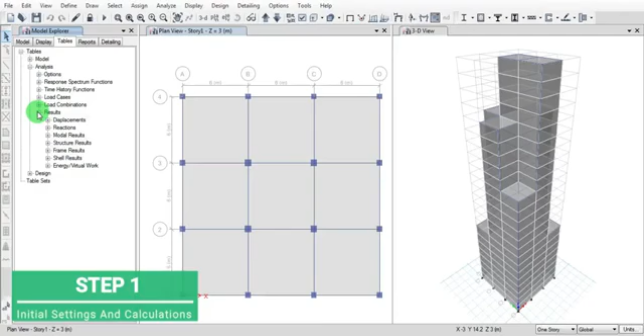Open the building for which we ran the analysis, the tall building. This is the model we created already. Then go to Tables, Analysis and Results, then Frame Results, click on Column Forces. Then arrange by Story 1.

Here we want only dead load cases. Then sort ascending. These are all the columns, C1 to C16. And then we have to know the column numbers here. To display the column number, go to the View option, Set View Options, click on Labels and click on Apply.

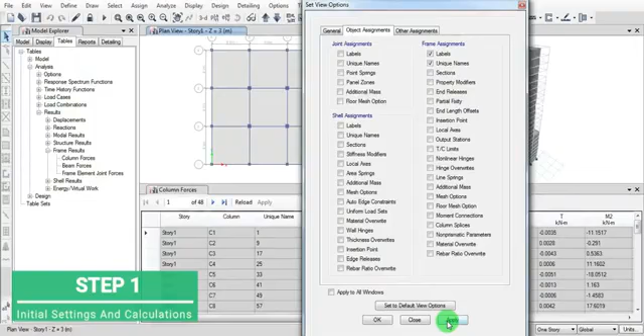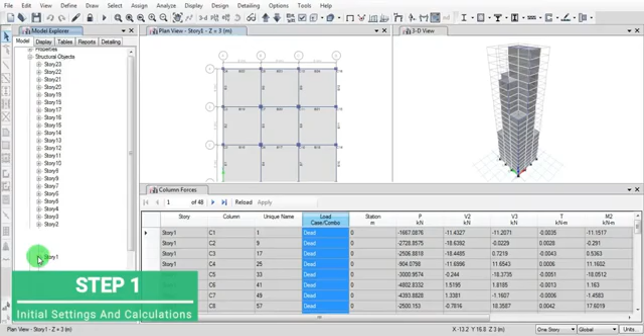Here we see all the column numbers like C1, C2, C3, C4, C5 up to C16. Now go to the structural object and Story 1. Here click C1. Here you get column sizes. Click on all the columns. Here you get all the details of the column sizes. There are 2 column sizes, 500 by 500 and 600 by 600.

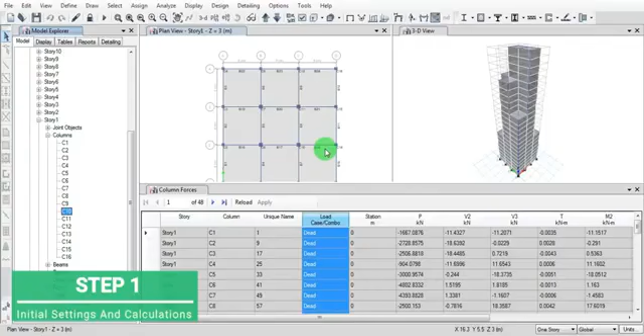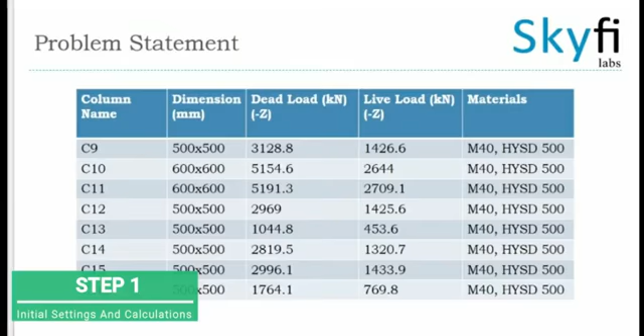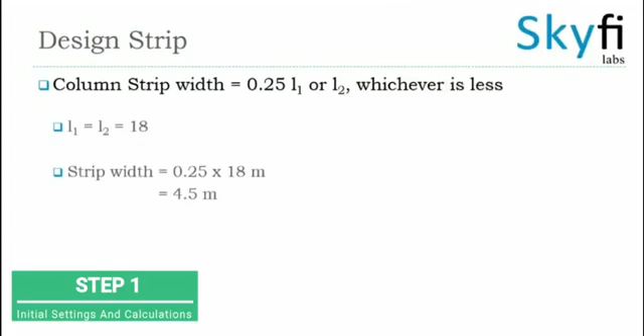Now define section properties. Go to section property and select materials for the 500 by 500, that is M40 and HYSD 500, similar for both. Now this is the problem statement we got from our design problem. It is a footing size of 18 by 18 with 2 meter extension on either side. This is how we have to find the subgrade modulus, and this is the calculation for the design strip.

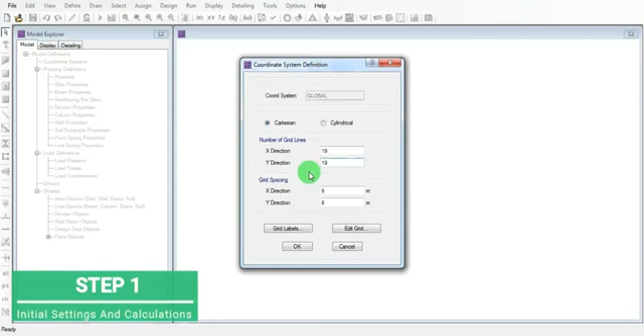Now go to the SAFE software and set IS456. Then add the cover and rebar options. Then set the grids. We have 18 meters, so there will be 19 grid lines in both directions. Now set 1 meter. This is how we got the grid.

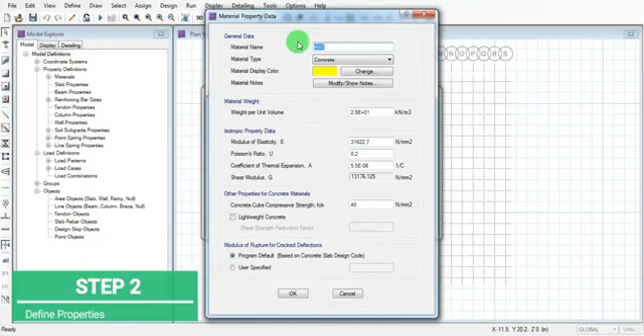Then go to material, define material M40 concrete and add all the standard values for M40. Click on OK. Then add HYSD 500 bar and add its standard properties. Then go to the slab property, add the slab property for the mat footing, which is M40. Add the thickness 500 mm.

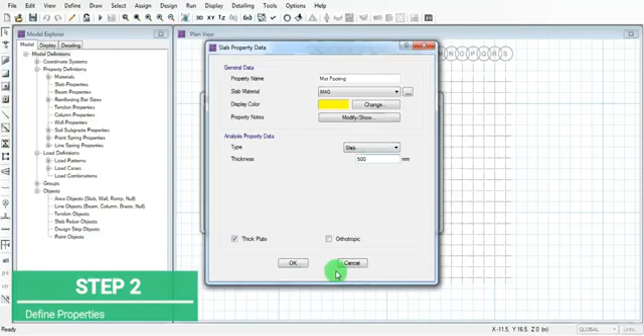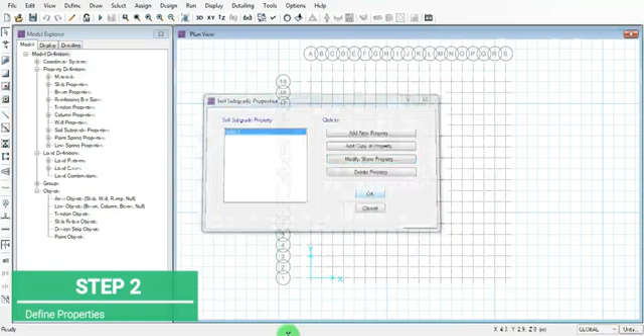Click on OK. Then define the column property, add a new column, column 1. We have 2 columns, 500 by 500 first. Add its sizes 500 by 500, click on OK. Then another column 600 by 600 and click on OK. Now add the soil property. We have 3 into 10 power 4. Load cases, check load.

Then add the load combination for the ultimate load. Now add for the service. Click all the service options and click on OK. 2 load combinations are added successfully. This is how we have to draw the slab. The slab has been drawn. Then go to Edit. We have an extension of 2 meters on either side.

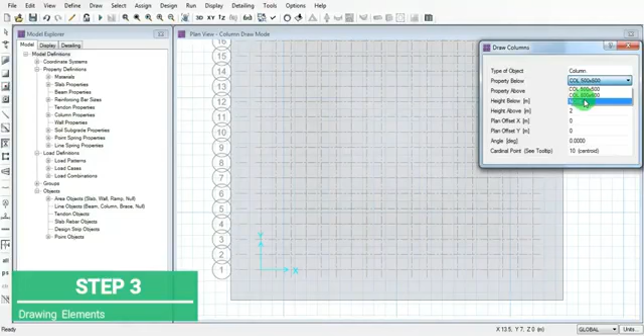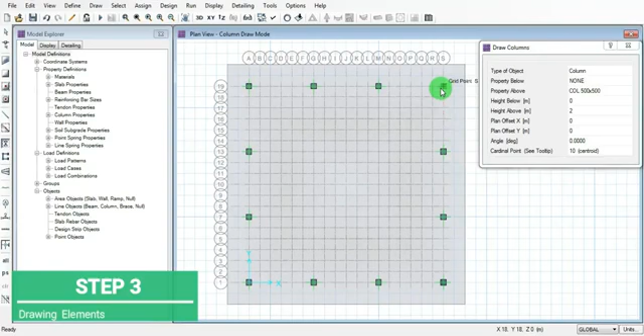We got the offset. Now draw the columns of 500 by 500 mm, 6 meters apart. Locate all the columns of 500 by 500 mm at the initial stage. Then add the 600 by 600 columns at the center.

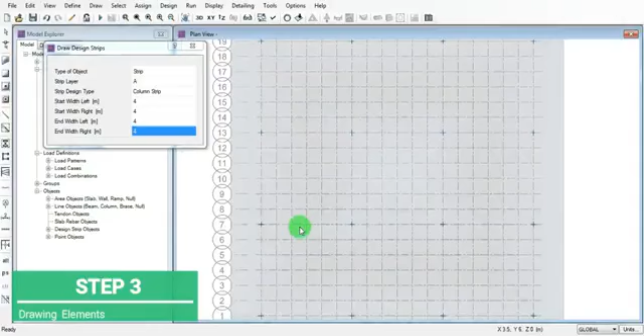Then add column strips, having a 4 meter width. Draw all the strips in layer A. Then in layer B, add the strips, 4 strips in Y direction.

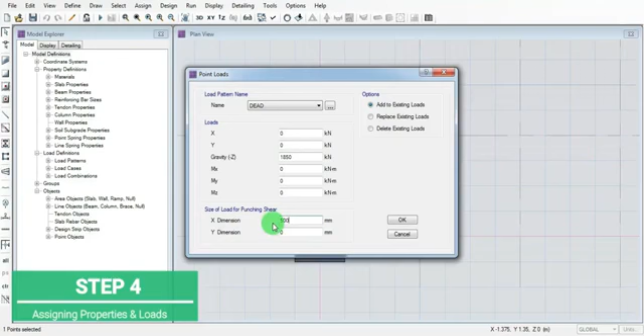Done. Now click on the footing area and add the soil property, that is soil 1. Then add a load on a column, the dead load for the 500 by 500 column. Then add the live load, which is 797.6. In a similar way, add all the loads for the 500 by 500 columns.

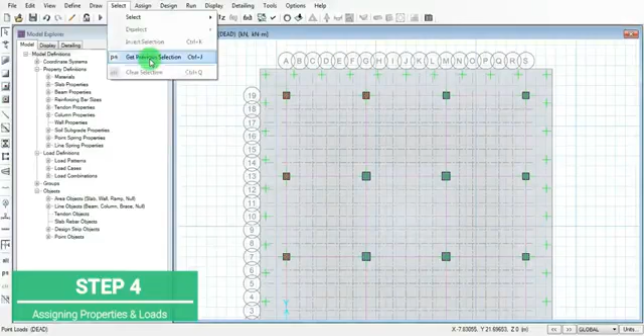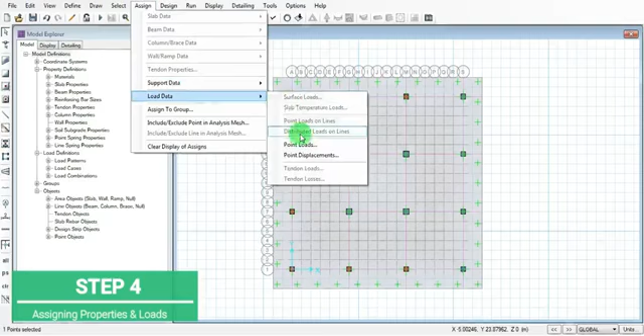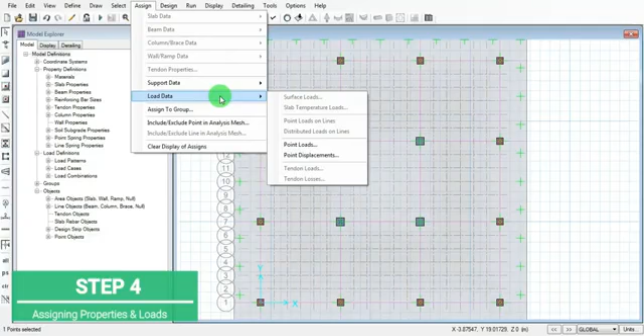Here the 500 by 500 columns are C1, C2, C3, C4, C5, C8, C9, C12, C13, 14, 15 and 16. Done. Now we added all the loads for the 500 by 500 columns. Then add a load on the central portion, that is for the 600 by 600 columns. Add dead load and live load in a similar fashion as we did for the 500 by 500 columns.

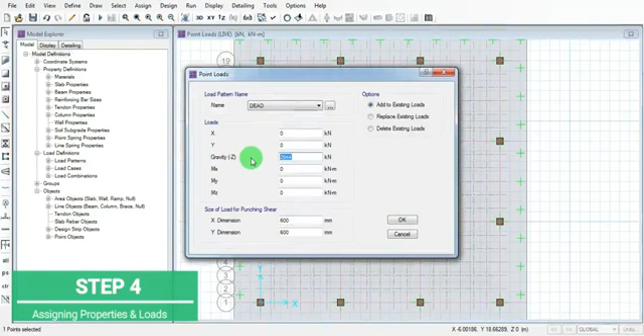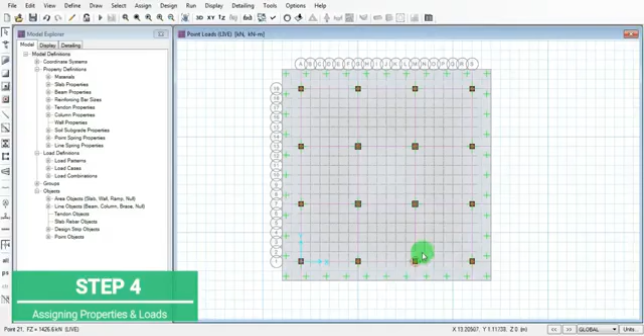Now we successfully added all the point loads. Then we have to assign the rebar properties. Click OK, we are checking. Now select our footing, add rebar options and add HYSD 500. Then click on the strips and add all the rebar properties. Click on all the strips of layer A and layer B.

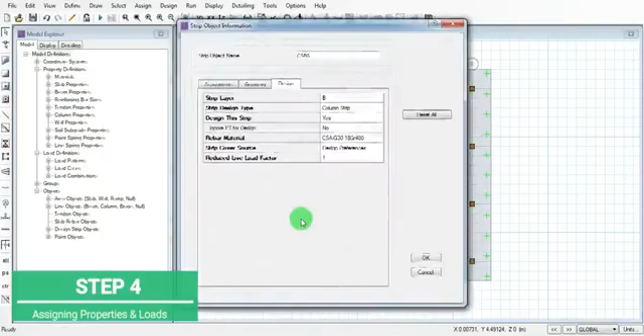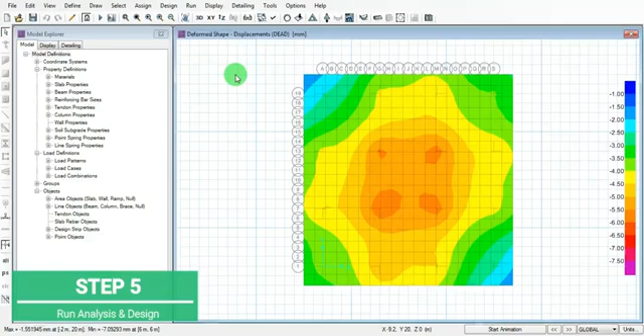Done. Now run analysis and design. Now click on the punching shear options. The shear is getting higher, so we revise the thickness by going to the material property. Again we are getting punching shear higher, so we increased the thickness to 1200, then ran the analysis again. Now we got a punching shear value less than 1.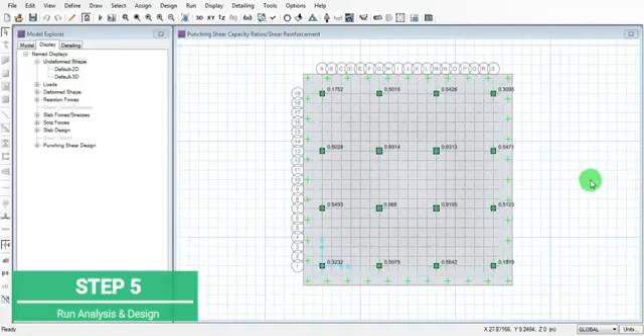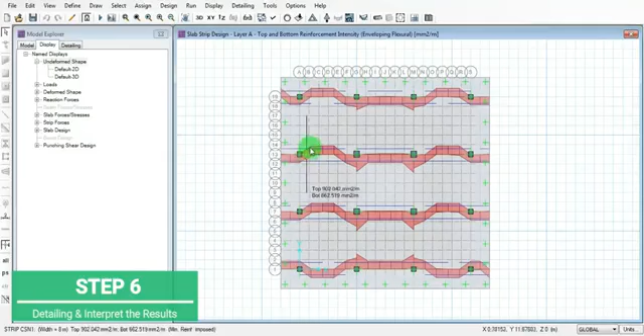Now view in 3D view, extruded option. This is the plan view again. The next part is to view the different load combinations. Before that, strip forces in layers A and B. Now get the reinforcement. Similarly in layer B for load combination A.

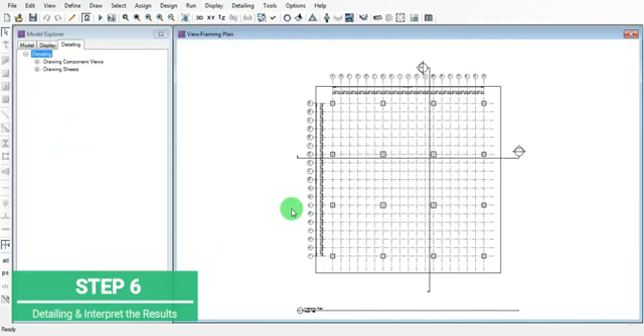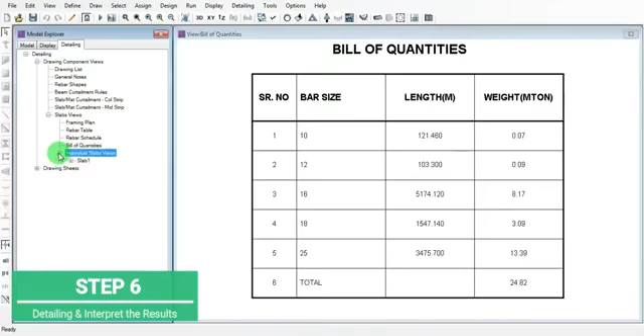These are the crack width values for the slab top and slab bottom. These are minor cracks. Start the detailing option. This is the detailing framing plan. Go to the framing plan. This is the framing rebar table, bill of quantity, with all the lengths of the rebars with bar size. These are slab plans like rebar plans, top plans, for all bars. This is section at 1, and this is the section reinforcement profile for layer A.